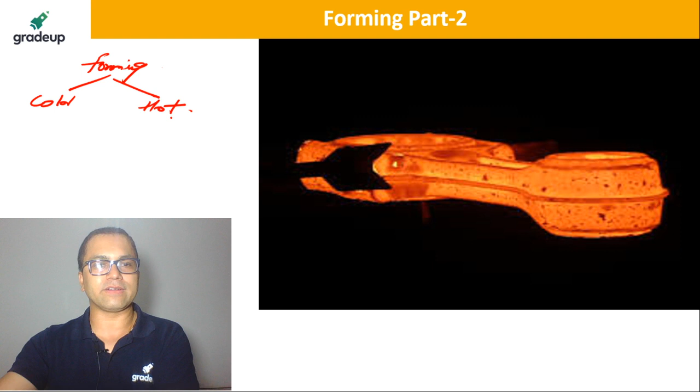Now, till now we have had a discussion about forming, right? We said that it can be done at ambient temperature, that's called cold forming. And it can also be done at hot temperature, and we are calling that hot forming. So hot forming is done at recrystallization temperature. So I'm going to just write it again over here: recrystallization

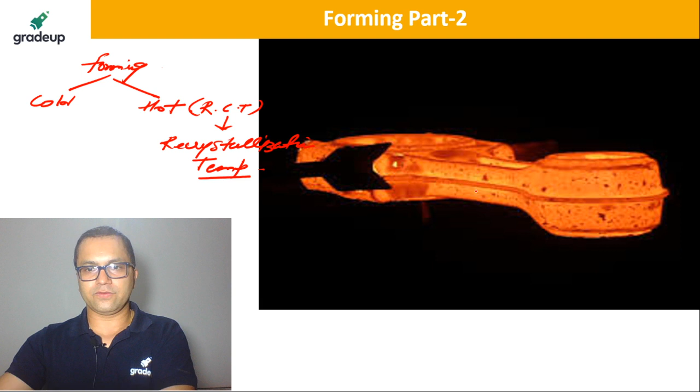temperature. Now, what is this figure? Is it hot forming or cold forming? Obviously, as you can see, this one is hot forming, because it is red hot here. So this is red hot.

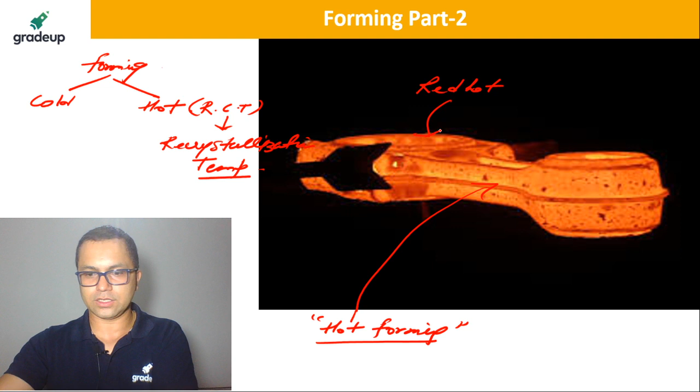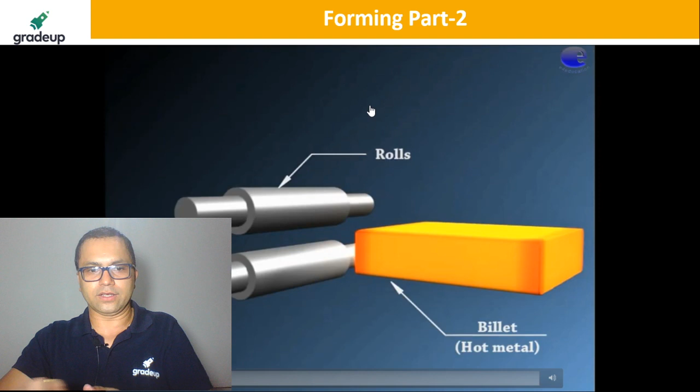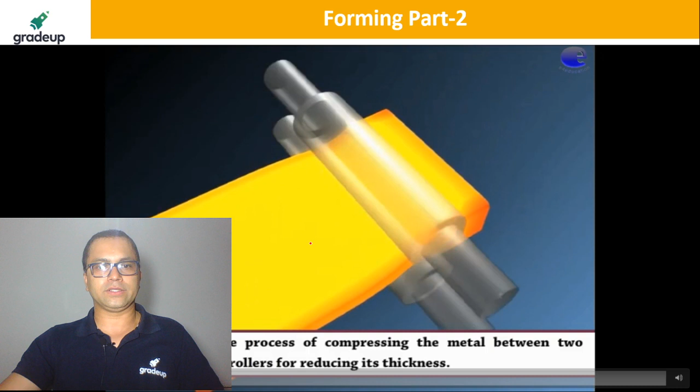Okay, now let's talk about rolling today. I'm going to show you an animation of rolling. So quickly let's see this. Now this is the raw material, a sheet or a plate. Now this is fed into rollers. It can also be hot and cold, again the same things.

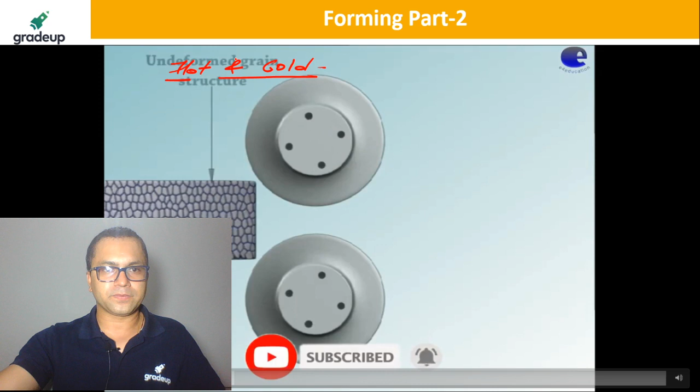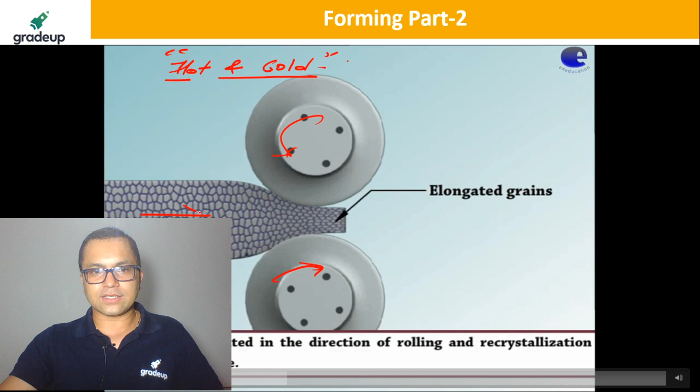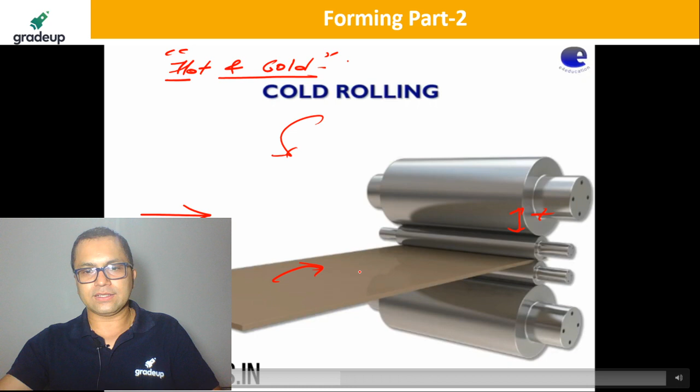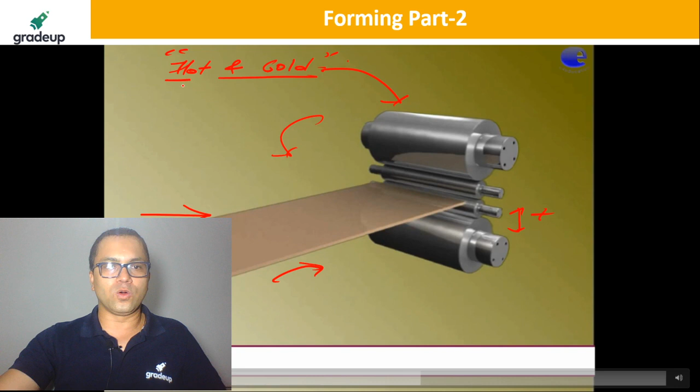So what is happening here is this is the direction of the rollers. Now once we pass this plate onto the rollers, the thickness gets decreased and the grains also become refined. Now it can also be cold forming, like this. The mechanism, concept and theory here is exactly the same, except that hot forming is done at recrystallization temperature and cold will be done

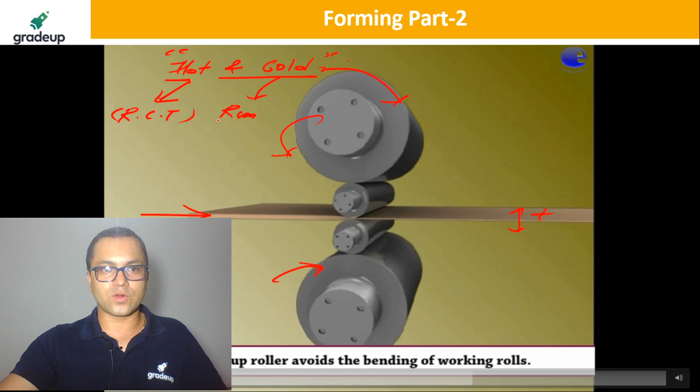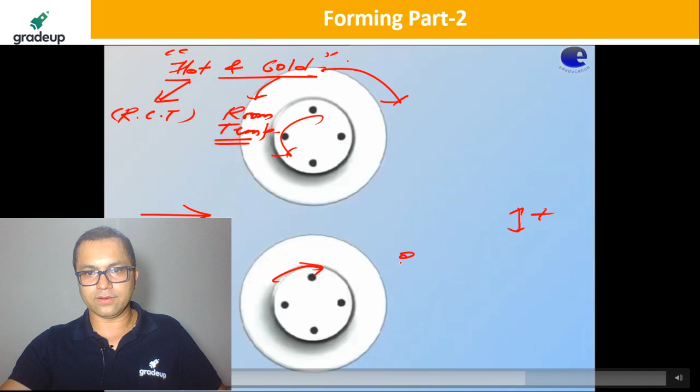at room temperature. So after rolling, the grains become very much refined. Now this is a 2D schematic of a rolling process. Let's say that the initial thickness here is h0 and the final thickness over here is h1. So what we are doing in rolling is reducing the thickness of a workpiece.

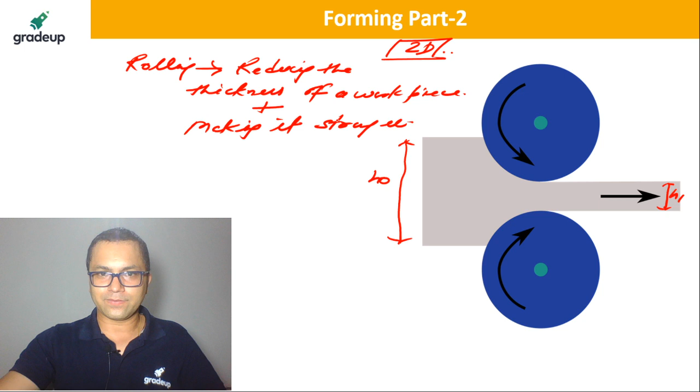Plus we are also making it stronger, guys. Do you agree? Because here we get a finer crystal structure, a finer grain structure. So because of this finer grain structure, we are making it stronger. So let's say that we have initial thickness as h0 over here and the final thickness as h1 over here.

And let's say that at this point the velocity is v0, and at this point where it's coming out, the velocity is v1. Now let me write it. So v0 is initial velocity, and v1 is final velocity. Let me just get rid of this so that I make it a bit better. So this is h0 from here to here. Initial velocity, final velocity.

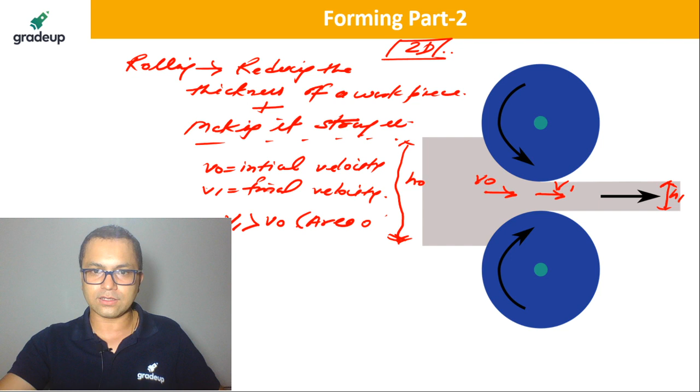So what we say here is that v1 is always greater than v0 because the area of cross section decreases. Are you getting that? Because there's a relation, A into v equals a constant, something like that.

So let me write it over here. v1 is greater than v0. This is what we say. Because the area of cross section here is decreasing, that's why the velocity is increasing. Are you getting this, guys?

Yeah, I'm not getting the feed. So let me see if I can get the feed.

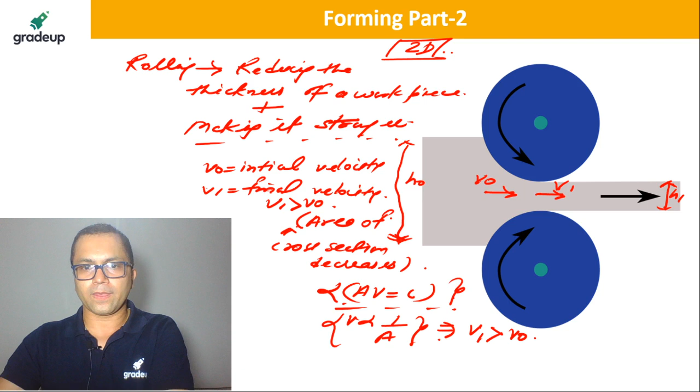All right, now this relationship. Let's say that we have h0 from here to here, we have h1 from here to here, and we have this velocity v1, and at this point this is v0, initial velocity and final velocity. So we are saying that h0 upon h1 is nothing but v1 upon v0. Please note all of this, guys. Is it good? So this is one of the relationships that you need to have.

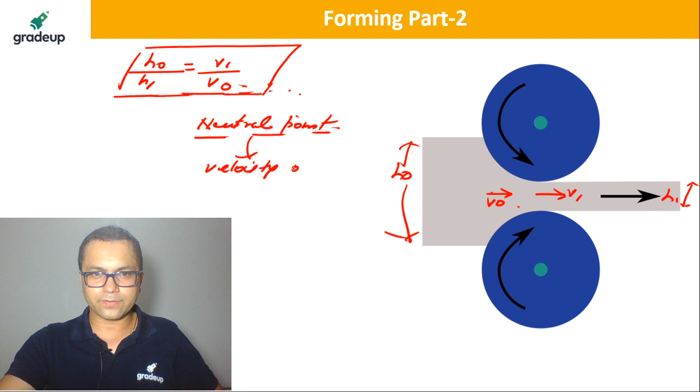Now let's talk about this thing. There's something called a neutral point or a neutral zone. At this point the velocity of strip, strip means the workpiece, equals the velocity of the roller. What is the velocity of roller? That is v equal to r into omega, right? R is nothing but d upon 2, into omega. So this is what we have.

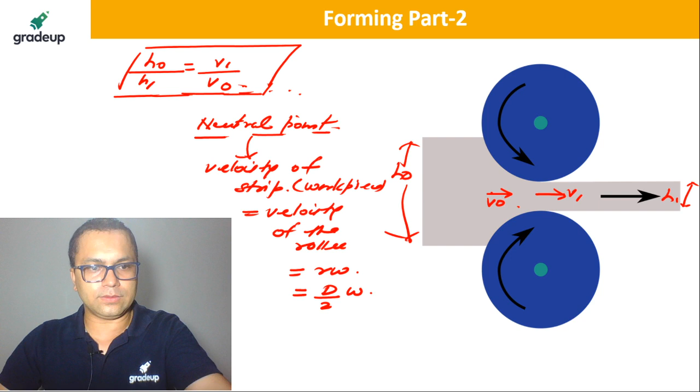Please note this point, all right? Are you getting this? So velocity of strip, meaning velocity of workpiece at this neutral point or neutral zone, is nothing but velocity of the roller, that is r into omega, that is d upon 2 into omega. Omega is the angular velocity here. D is the diameter of the roller, as you can see over here. So d equals dia, omega equals angular velocity, right?

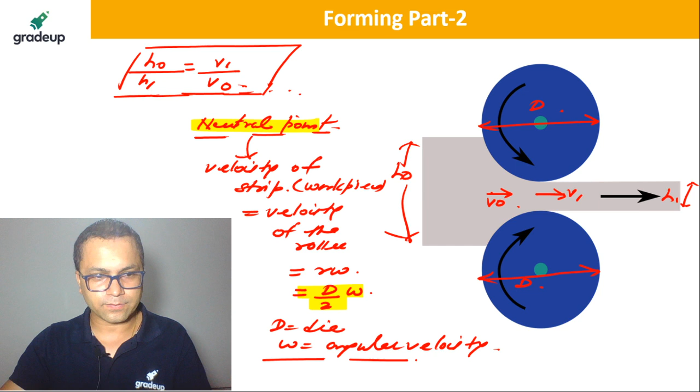You guys getting this? Hello? Again, I have the same issue. Not getting the feed. The feed thing keeps happening here. Okay. Is that good, guys? Are we good here?

We have very interesting questions at the end of this video, but obviously we have to take some formulas here, so that we go there with new energy and new understanding. So W is angular velocity in radians per second over here. Is it good?

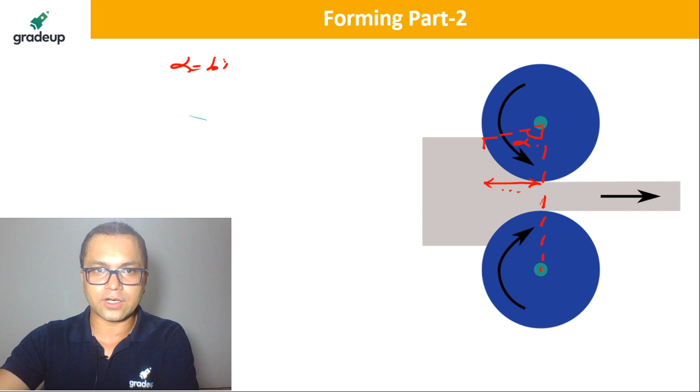Now let's come to another discussion. The distance from here to here, and if we join these two centers, let's say this angle is alpha. So alpha is nothing but the bite angle over here.

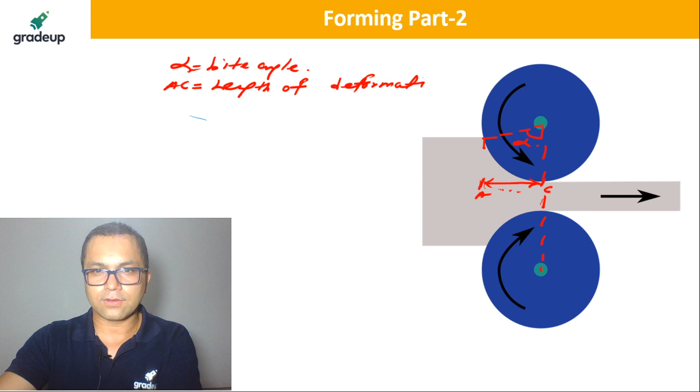And this distance AC is called the length of deformation zone. Why deformation zone? Because at this zone the deformation is taking place. So this red zone is nothing but the deformation zone. Are you guys getting this?

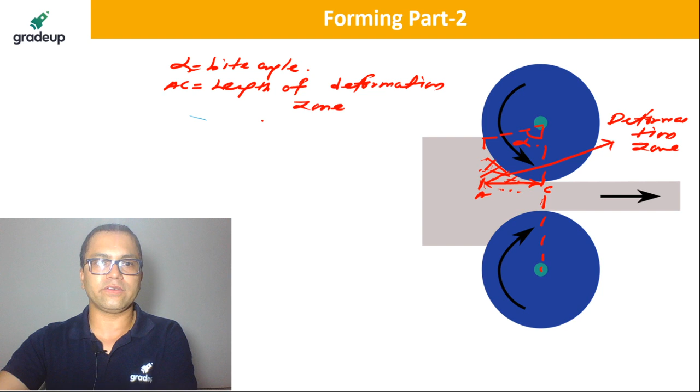And AC, the length of deformation zone, is given by under root of R into delta H, where R equals D upon 2. This is the diameter of the roller, and this is the radius of the roller. R equals D upon 2. So let me just write it, radius of the roller, that's nothing but D upon 2.

Now what is delta H? Delta H is thickness reduction, and that is given by H0 minus H1. Are you guys writing all of this? H0 is the initial thickness, and H1 is the final thickness over here.

Okay, so if you don't know how to visualize H0 and H1, this is something like that. H0 is this height over here and H1 is this height.

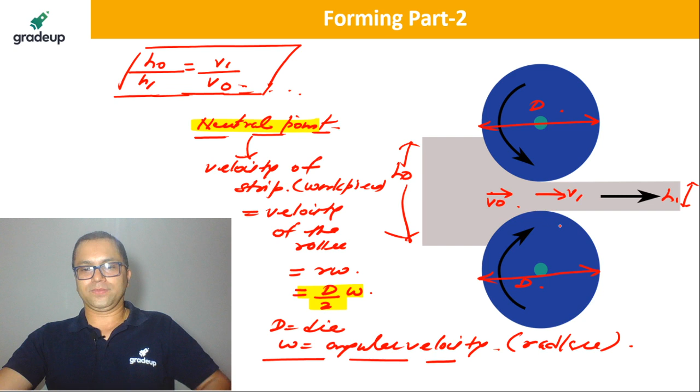Is it good? Now a bit of theory, guys. All right, now we'll jump straight away to the questions here. Is it good? Hello? Is it good?

Okay, fine. So now maximum reduction in thickness. It also has a formula. It is given by mu square into R. So please note all of this. We will talk about this. Yes, Nitish Kumar, you're right. So H0 minus HF, because H0 is more than HF. So maximum reduction in thickness is given like this: delta H max equals mu square into R.

Are you getting this? Mu here is coefficient of friction and R is radius of the roller. All right, now there's one more thing. For rolling to take place, there's just one condition, guys. That condition is alpha. What is alpha? That is the bite angle or the deformation angle. The bite angle should be less than or equal to beta.

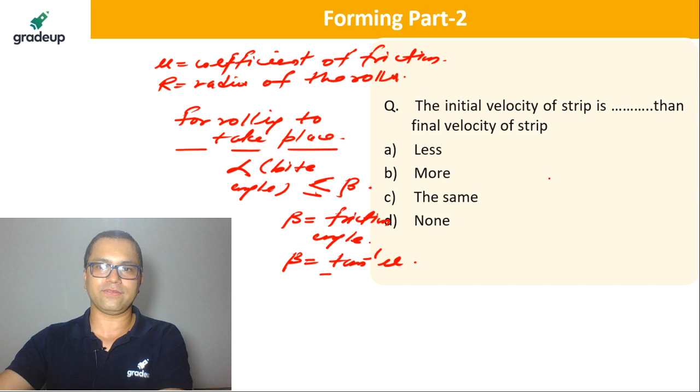Chaitanya says it's A. So initial velocity is lesser than final velocity. We talked about this: V1 is the final velocity and that is greater than V0, isn't it? V1 is always greater than V0. So initial velocity is what? Lesser than. Yes, the initial velocity of strip is less than the final velocity of strip, because V0 is less than V1.

So Hiten, yes, you're right. So A is the answer here. Initial velocity of strip is lesser than final velocity of strip. Yes, you're right, Sanjeev Kumar. Good, well done. Now the next question: to avoid bending.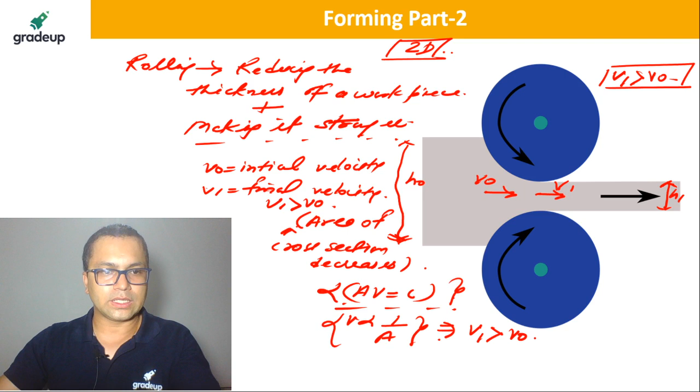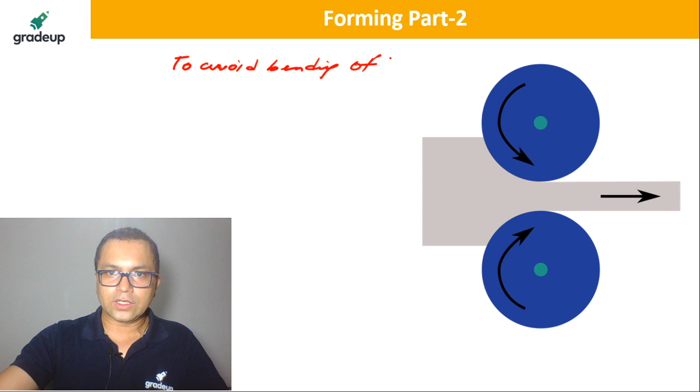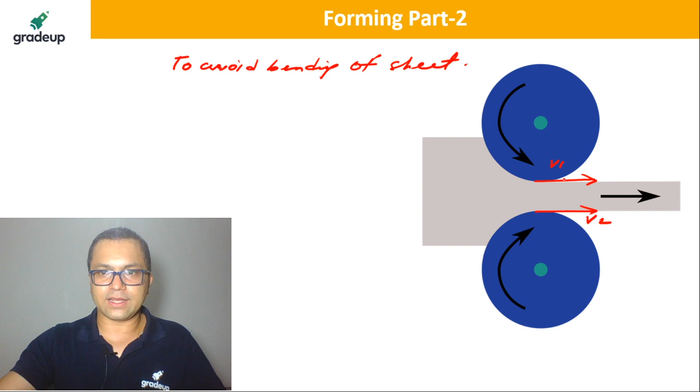Now let's talk about this bending thing. We have not talked about bending yet, but let's talk about it here. To avoid bending of a sheet, the velocity of the rollers should be equal. Let's say V1 and V2 are the velocities of both the rollers. So V1 equals V2. These are tangential velocities.

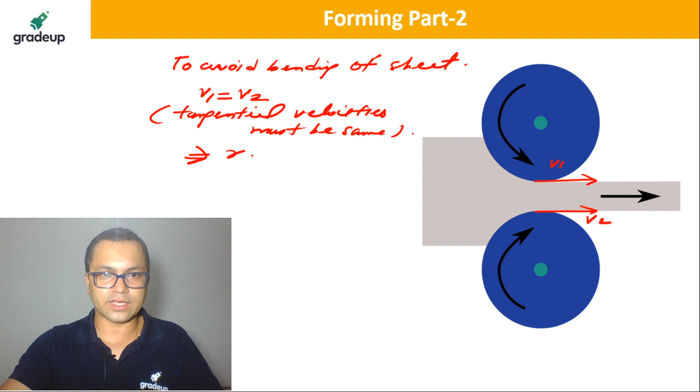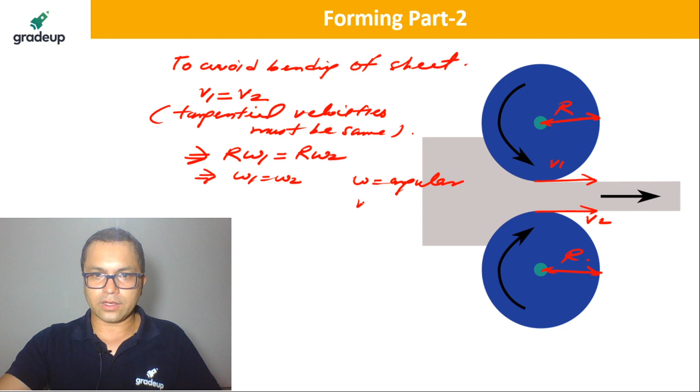So tangential velocities must be same. So what does it mean? V is nothing but R omega. So R omega 1 equals R omega 2, where R is the radius of this roller and R is also the radius of this roller. So omega 1 should also be equal to omega 2. Omega is angular velocity in radians per second.

Is that good? So omega is angular velocity in radian per second. Omega is 2 pi n, so 2 pi n1 equals 2 pi n2. Let me write it here because it's overlapping. Where n1 and n2 are rpm, because omega equals 2 pi n. So n1 equals n2. So n1 equals n2, omega 1 equals omega 2, v1 equals v2. These are the conditions. Are you getting this? n1, n2 are rpms here, revolutions per minute.

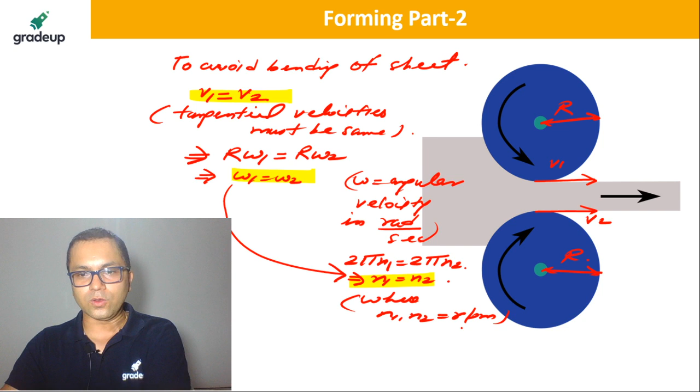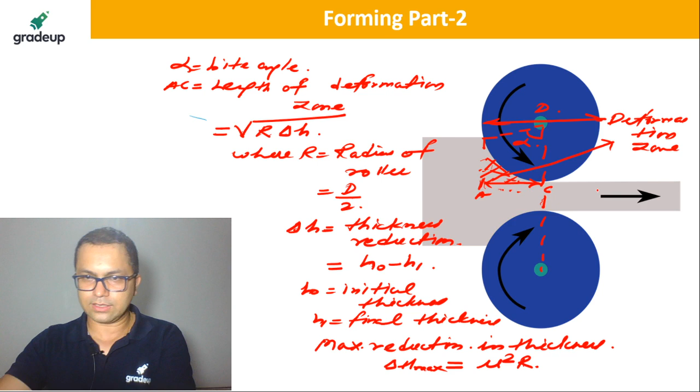Okay, so Hiten, now let's say that if this is bigger, right? Let's assume omega is same, so this velocity is going to be more here at this point of time, and it's going to be less here. If this roller is big enough, it will move, so yes, intuitively it's coming, it should be bending upwards, all right? Yep, so it should be bending upwards.

So there are so many things there to avoid bending, but we are here talking about bending in this plane right now, okay Nitish? We are here talking about bending in this plane only, okay? It can also be in other planes as well, right? So we are just talking about bending up and bending down here.

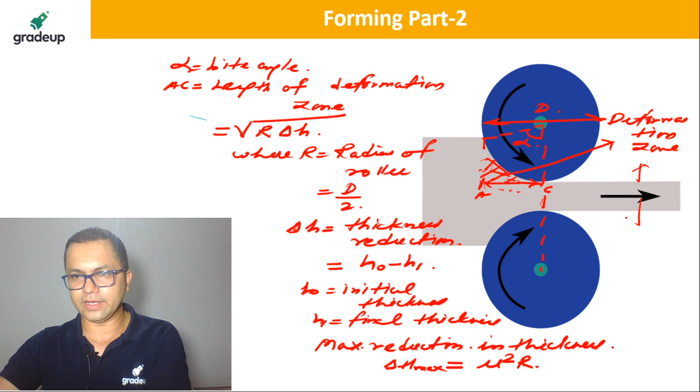Is it good? Yep, now the next question, okay, now H0 is 50 mm and...

Yeah we do, Hiten, we do make shells using forming, right, but we use 3 rollers instead of 2, okay that we do. We'll talk about it in next sessions. Yes we do that, Hiten, yes you're right, but we use 3 rollers. All right, rollers are something like this, then a sheet is pressed like this, it's put like this, so we are able to make shells, depending on the distance between these 3 rollers. It is possible to make shells, but yes, using 3 rollers at least, okay.

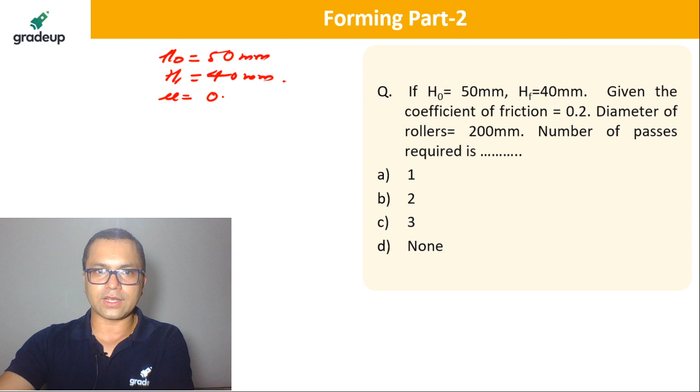Now here's what we are given: H0 is 50 mm initial, and H final is 40 mm. So I'm going to just use the same notation that we have been using, so H1 is again 40 mm, all right. Now given the coefficient of friction, mu is given to you as 0.2. So diameter of rollers is also given to you, 200 mm, okay.

So number of passes required is... what? Sridhar Gupta, to you, let me tell you that no, this is not very much sufficient to clear GATE, all right. Your efforts also count, right? What about your notes? What about your belief, isn't it? What about your preparation, right? So that's what it is. Okay fine, so Salahuddin says that answer is C, okay.

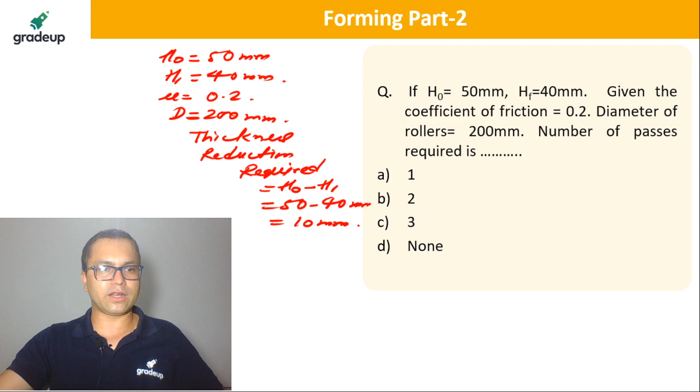So fine, how do we calculate - now what we say is thickness reduction required. How much is the thickness reduction required here? That is H0 minus H1, right? So that's nothing but 50 minus 40 mm. So this is how much? 10 mm, right? Sanjeev Kumar, okay let's see, I think you're right, okay. Those who are saying C, I think they are correct, all right. So let's see.

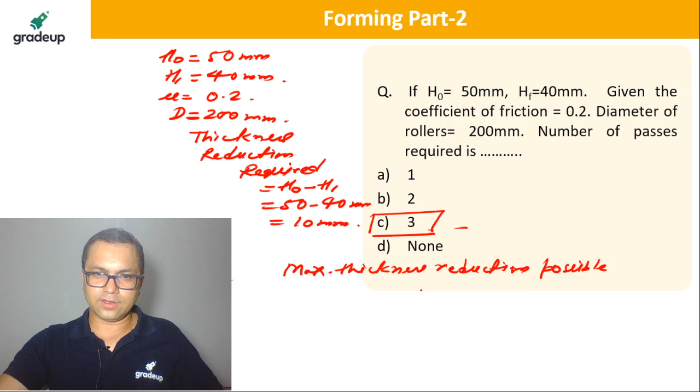Now thickness reduction required is 10 mm, okay. Now let's calculate this maximum thickness reduction possible. The maximum thickness reduction possible is how much? Reduction possible equals to how much? That's mu square into R, right? Isn't it? So maximum thickness reduction possible is mu square into R. So that's nothing but 0.2 square into what is R? So D is 200 mm, so radius is 100 mm, right? So R is 100, so this is how much? How much are you getting this? So this is 0.04 into 100, so that is nothing but 4 mm, okay?

So in one pass, you have 4 mm, so this is nothing but 4 mm per pass, all right, mu square R per pass. Okay, so number of passes required is how much? Let's say n equals number of passes, so that should be 10 upon 4, right? So that is 2.5. So obviously we will not be able to complete it in 2.5, so what should be the answer? Hiten, yes you're right, so number of passes cannot be 2.5, right? So what should be the answer here?

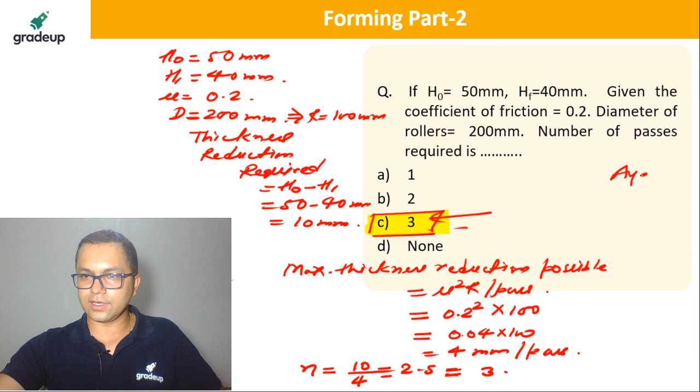Hello, is it clear to you? Just type in I if this is clear to you, okay? Because I told you, right, the maximum thickness reduction here. We had a discussion about that, right? So what is that? Mu square into R, this one, right?

So we talked about it. Maximum reduction in thickness is mu square into r. So in one pass, how much maximum reduction it can take? So that's 4 mm here. I hope that you're getting this, okay? That's 4 mm. Now, required thickness reduction is 10 mm, right? So how many passes? So 10 upon 4, that is 2.5, but it cannot be 2.5. So it has to be 3, right? So that's where it is.

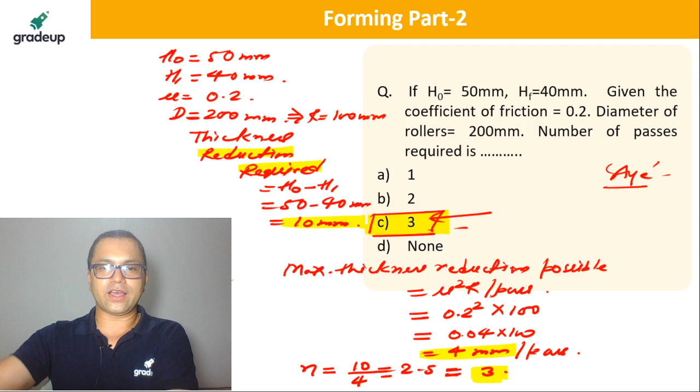Next question, guys, okay? Now, how many of you got it correctly? 3. Just type in, I want to see your names, okay? How many of you guys got it correctly? Come on.

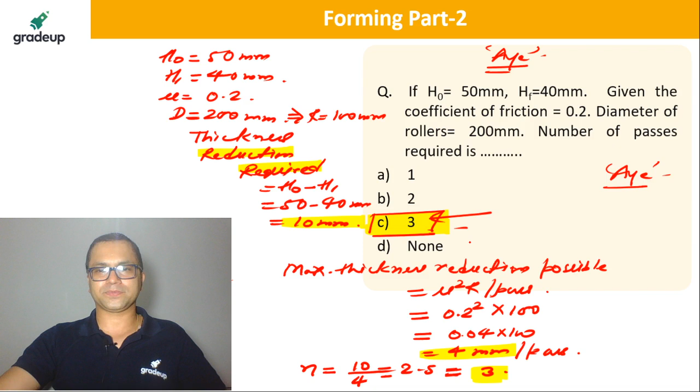Okay, now the next question. Now this is the next question, okay? So this is the next question. Okay, Devarshi, Salahuddin, Nitish Kumar, Sanjeev, Sridhar. Okay, good guys, good. I think 5-6 guys over there, right? Devarshi again and Sanjeev Kumar. Good guys, good, impressive.

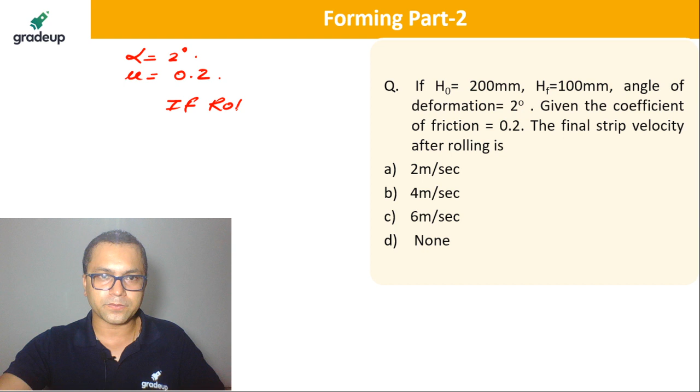Okay, so always, even before starting, just try to find if rolling is possible. Okay, this is the hint here. If rolling is possible. Okay, so just check if alpha is less than equal to beta, or alpha is less than equal to tan inverse of mu, right? So this is what we talked about, isn't it? Where alpha is the deformation angle, right?

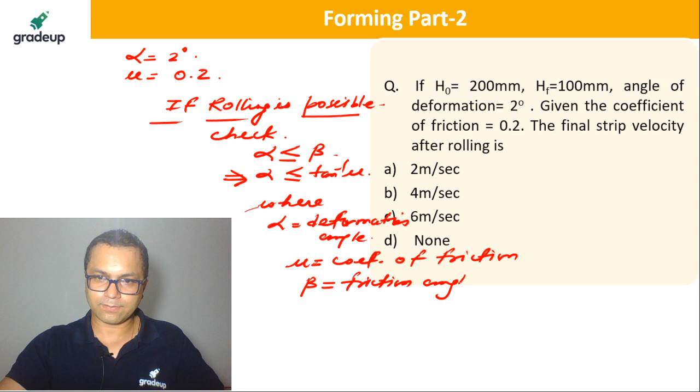So alpha is the deformation angle, and mu is what? Mu is coefficient of friction. Okay, now what is beta? Beta is what? Friction angle here, right? Alpha is deformation angle, mu is coefficient of friction, beta is friction angle, right?

So is it happening? What? Is this happening? Alpha is less than equal to tan inverse mu. Is it happening? Because this is the condition if rolling is possible, right?

So let's say that, check if alpha is less than equal to tan inverse mu. What is alpha? 2 degrees. What is tan inverse 0.2? How much is this? So is it happening? 2 degrees less than equal to tan inverse mu. So what is tan inverse mu? That is 0.2, right? So that's 0.197 radians. Is it true?

So this is 0.197 radians, right? How come is it 11.3? Arre, this mu isn't in radians, alright? Just... mu is in radians, okay? So this is 0.2 radians, this is not degrees. So tan inverse 0.2, I am getting it as 0.197.

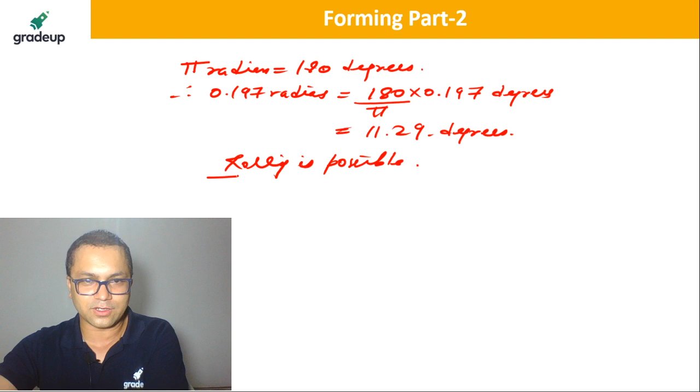Okay. Now using these information, okay. So final strip velocity after rolling. So can you please find out the final strip velocity? Is it possible to find out V1? All right.

Now we are given, yeah, just one is very much fine. All right. So we are given H0, we are given HF, we are given angle of deformation, and we are given coefficient of friction, all right? So is it possible to find out the final strip velocity after rolling? So what we are talking here is V1 equals to how much?

Is it possible? Come on guys, can you please try to find it?

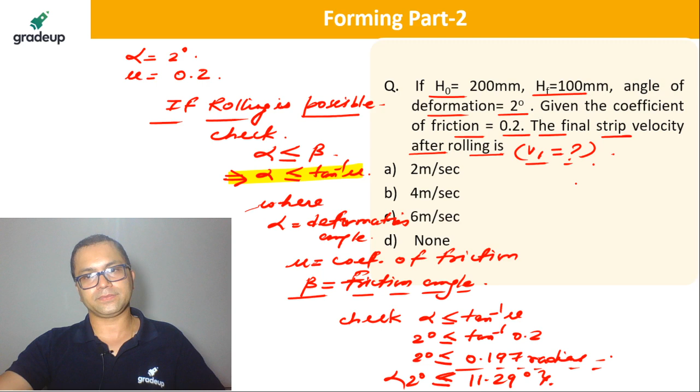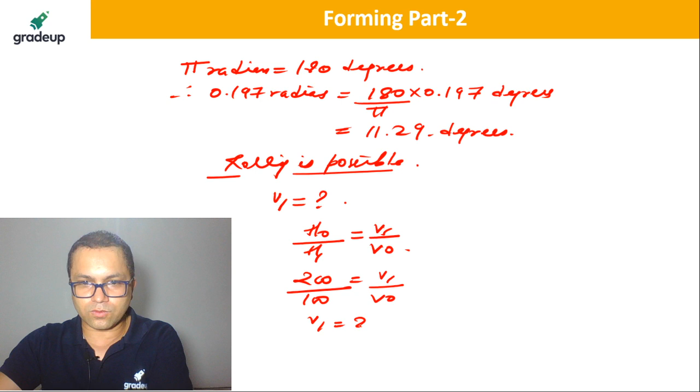Now there's something like this, right? So what do we have? H0 upon H1 is what? V1 upon V0, right? Is this that we can use? We can use that. So H0 is 200, H1 is 100, right? And this is V1 upon V0. So what we have is V1 equals to twice V0. So one relation we have gotten here.

Isn't it? Yes. So V1 equals to twice of V0 here, right? Are we getting it? Yes. So what else can we do over here? Can anyone try to find it? This is one of the relationships.

Now there's another relationship, tan alpha equal to under root delta H upon R, all right? So this is another relationship that we have, okay?

All right, now alpha is given to us. Alpha is how much? Angular deformation, that is 2 degrees. So tan of 2 degrees is, what is delta H? Delta H is 200 minus 100, upon R, right? We can calculate R using this, right?

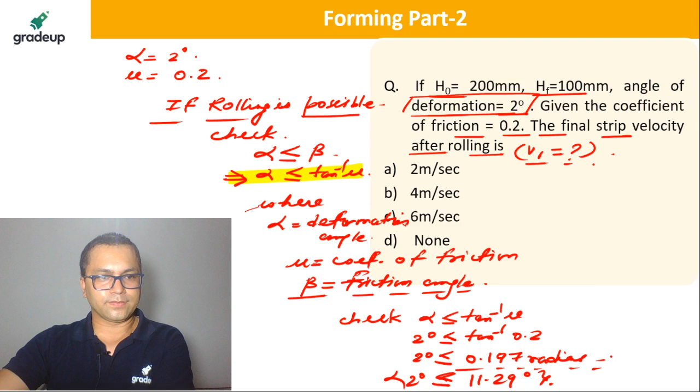So alpha is in radians. No, this is in degrees here, right? Alpha is given to you in degrees. So no angular velocity required. So Devarshi, can you please tell me? So angular velocity, you are saying that, okay?

Okay, so alpha is in radians, okay? Radius. Alpha, you are saying. No, that doesn't seem to me, all right? So what I would write is, okay, this data is insufficient. I don't think that we can do it using this, all right? So data is insufficient here to calculate V1 and V0, okay? So that's D, it should be D here, right? Are you getting that?

V equal to R alpha, that is for the roller, okay, Chaitanya. V equal to R into omega, right? That is for the roller. It is not for strip, right? Are you getting this? So D should be the answer here, okay?

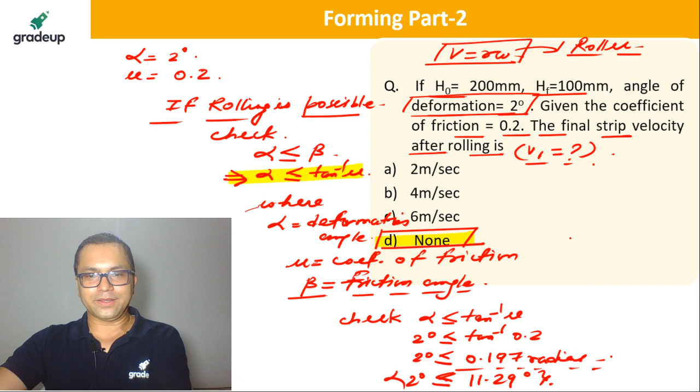None. Yes, but where is omega? Omega should be given for the roller, right? Chaitanya, are you getting that? So R obviously can be found out, right, using this, or you can also use some other relationship, for example this one, okay. But using this, you can always find the value of R here, right? Are you getting this?

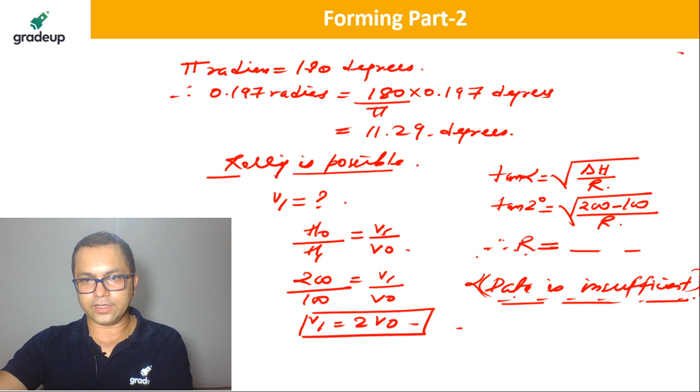Yep. Is that good? Devarshi, actually, even if you just say that it's a biaxial compressive, okay, it's a normal force that you're giving it to it. So normal stresses also give rise to shear stresses, right? We always have shear stresses because of normal stresses as well, right? Devarshi, now you tell me what should be it.

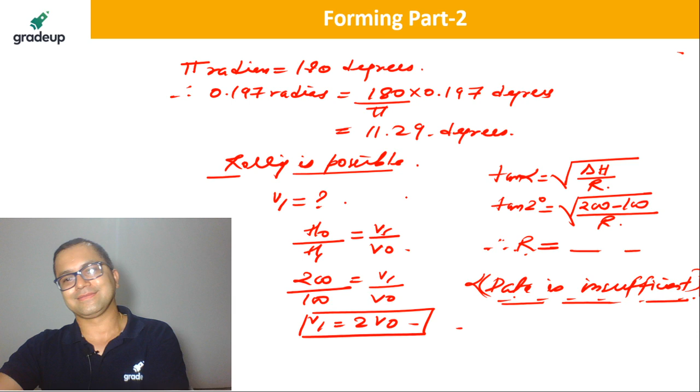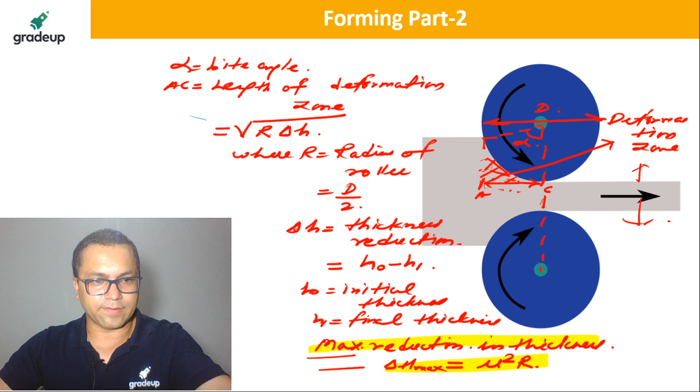Okay, so data is insufficient, so answer is D here, right? Now please tell me this. Now, given the frictional force to the strip is 10 newtons, normal force is 10 newton, the net force acting on one of the rollers is, so even before that, let's go back, okay? Even before that, let's do this here.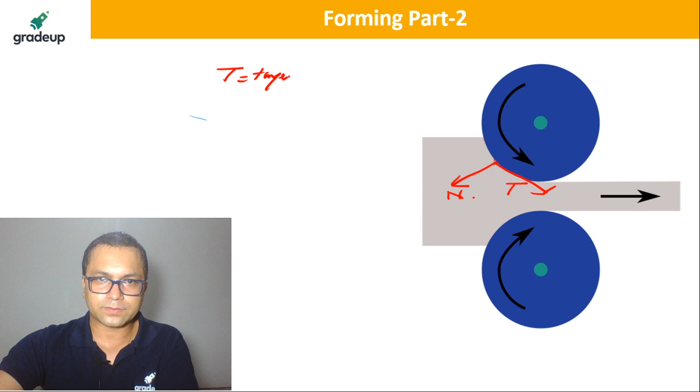All right, so what is given to us here is that, let's say the friction force is like this, or the tangential force is like that, okay? And a normal reaction is like that, okay? So T is the tangential force, okay, tangential force. All right, and N is the normal force, right?

Isn't it? So T is the tangential force, N is the normal force, all right, and they are acting at perpendicular angles to each other. So what should be the resultant force here? So resultant force should be T square plus N square, right? Because they are perpendicular. Are you getting that? Yes.

So obviously, if there's, let's say, purely compressive force, we always have a shear stress associated with that, right? So R should be equal to T square plus N square. Do you agree to this? Hello. So what is happening here is that T, okay, tangential force is nothing but the frictional force here. All right, and N is the normal force here. So resultant here is given by T square plus N square, right?

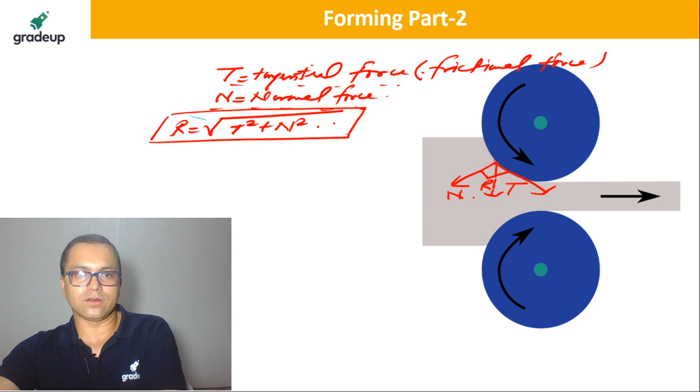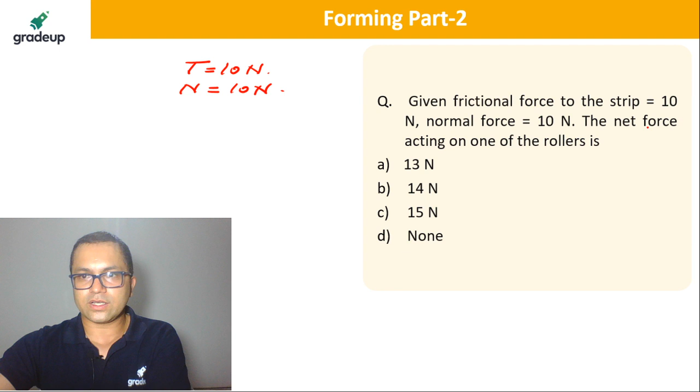Hello, because they are perpendicular to each other. So what should be the answer here? Net force acting on one of the rollers. So friction force T, let's say, is given to you 10 newtons. Okay, and the normal reaction is given to you 10 newtons. So what should be the net force? R. Can you please find it? Come on, guys.

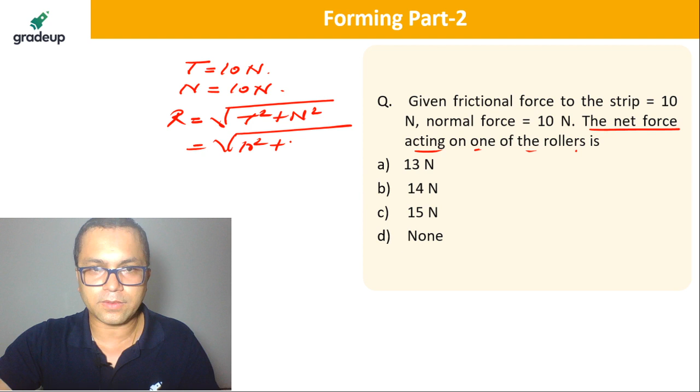Are you getting this? Okay, fine. Yes, so R should be what? It should be T square plus N square, right? So that's nothing but 10 square plus 10 square. So that's nothing but 10 root 2, right? So it should be closer to B, okay? So it should be around 14.1. Right? So B is the answer, guys.

Anurag, yes, you're right. Okay, good. Well done, guys. Is it good? Hello? You guys good there? Okay, now let me tell you that today the questions were a bit tough, okay?

Hiten, yes, so it has to be B, okay, because these are two perpendicular forces acting here, right? Let's say that this is T, this is N. So the resultant here is what? Under root of T square plus N square, right? Because it's a right triangle, not a perpendicular triangle, but a right triangle. Is that good? Hello? Yep.

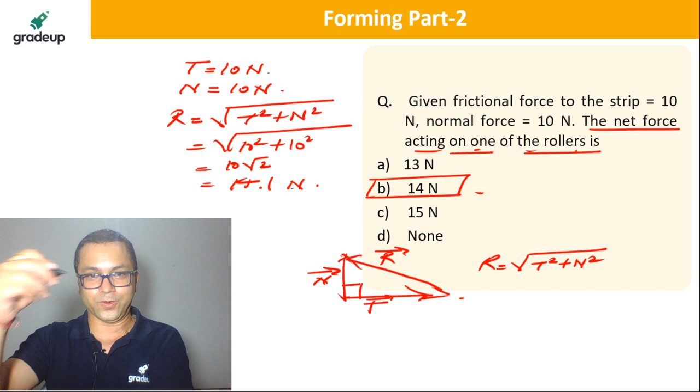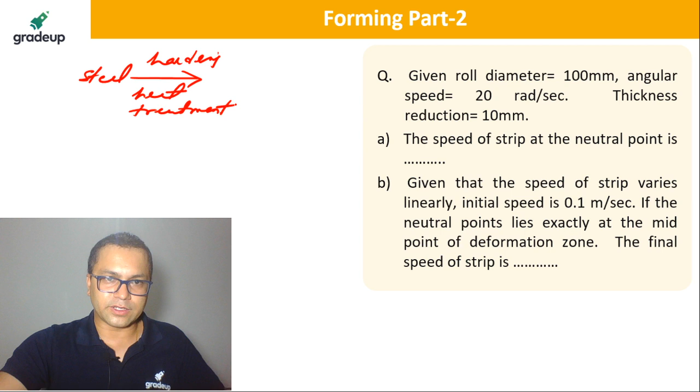Okay, Chaitanya. Actually, these were really tough. I have made these questions of my own. Okay, now please note this question. Go back and do this. Yeah, exactly, Chaitanya. For example, steel. Steel goes through so many processes, right? Hardening, annealing, and so many processes. Heat treatment. Let me just write it. Heat treatment. So steel goes through heat treatment, then it becomes stronger, right? So this is the same here. If you're not struggling, if everything is very easy to you, you're not going to grow, right? So that's where it is.

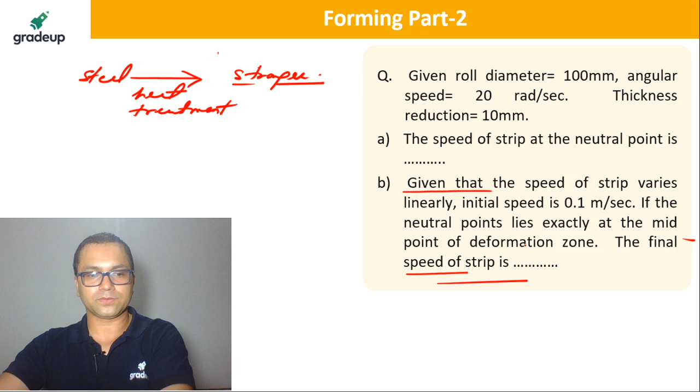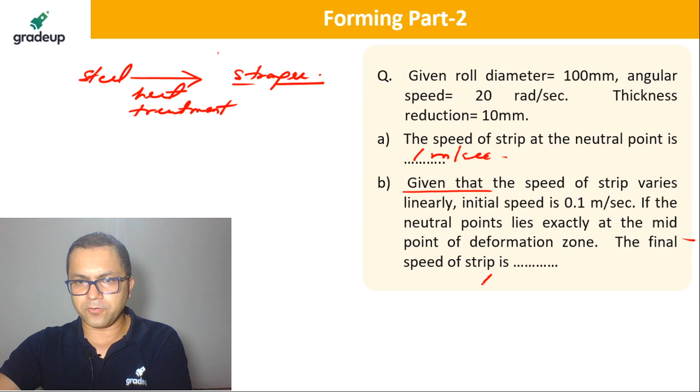This is another very challenging question, especially part B here. If you don't get this, I'm going to tell you this question tomorrow. So Chaitanya says it's 1 meter per second. So this is nothing but 1 meter per second. Yes, you should be getting it as 1 meter per second, and from what I remember, I think it should be 1.9 meter per second. I might be wrong, but yes, close to this. So 1.9 meter per second. You can take a screenshot of this. Just go back and try to do this question.

Yeah, Hiten. Okay, but yes, if it has a discrepancy, I will tell you tomorrow. If the thought process is not right, maybe there are some assumptions, so many assumptions out there, right? But that's how it happens in real life. So yes, Hiten, I'm going to see you again tomorrow. But please do this question, especially this B one. It's really interesting and it's really tough.